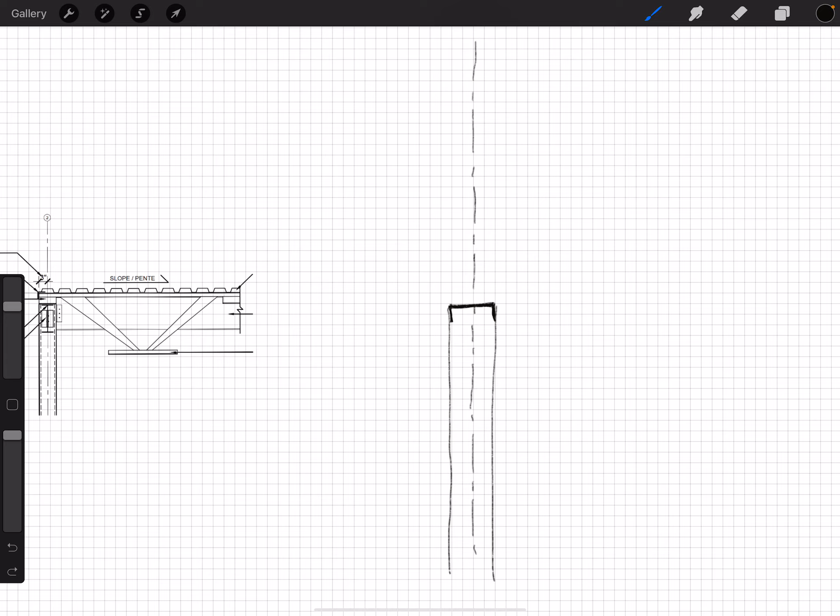I've got my stud. And on top of my stud, again, I need to put my I-beam, which sort of sits on the studs, but not really. It really sits on the column. And in your steel drawing, you've got the column there. But in between the columns are these studs. And the studs just kind of hold up the wall. They hold up the gypsum. They hold up the aesthetic parts of the wall. They don't hold up the structural parts of the wall.

And that's why this top guy here is a deflection track. It's almost as if it's not really attached to the ceiling. There's a lot of movement allowed in that wall, in that part of it. So we've got that. We've got our joist seat that comes on top. This is going to look a lot for a minute like it did on the second floor. So our joist, that's going to go there. And our joist is going to come down here like that.

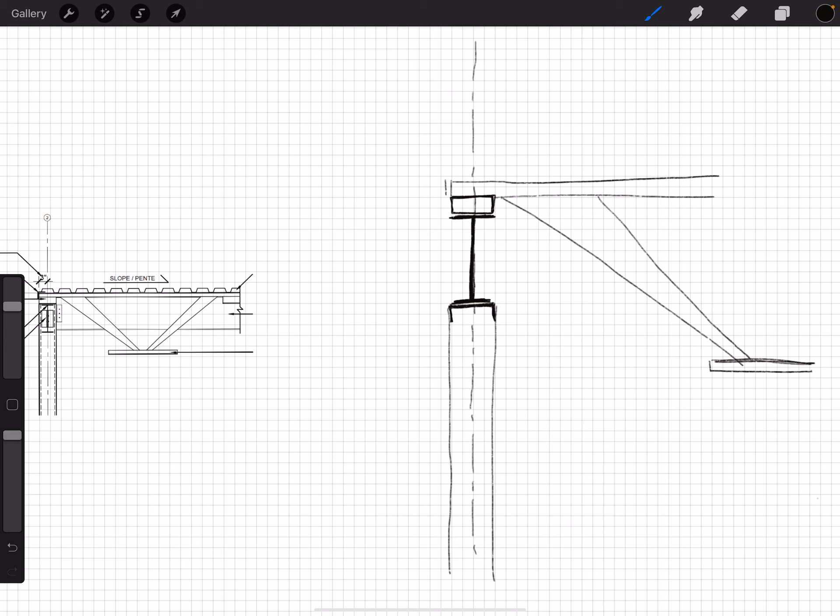And you've got the height of your joist from your steel section. You've got the I-beam size from your steel section. You've got your joist seat, etc. We know that we have this time an L angle. And I'm just giving this a little bit of space here that comes this way. And we've got our decking now that's coming on top here. Our steel decking, and this time no concrete, right? Because there's no floor. So that's pretty much what we're going to be showing here.

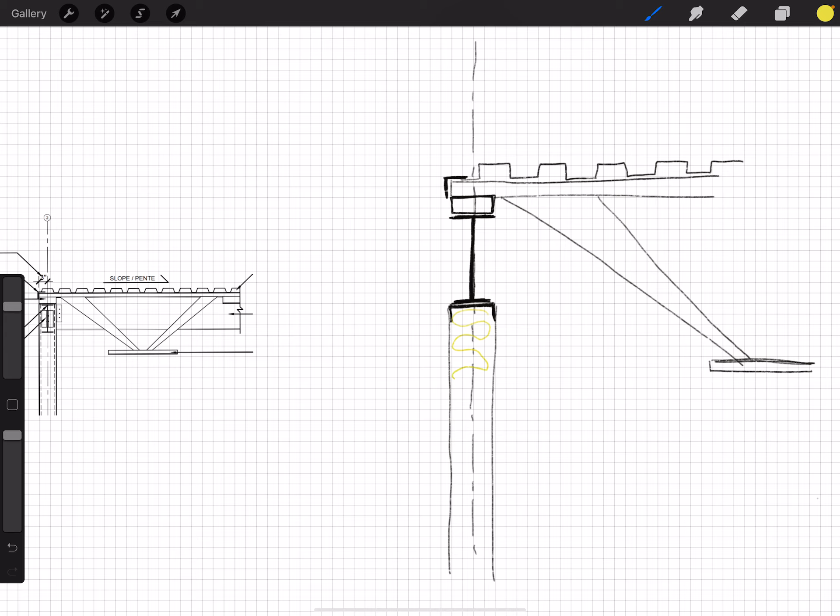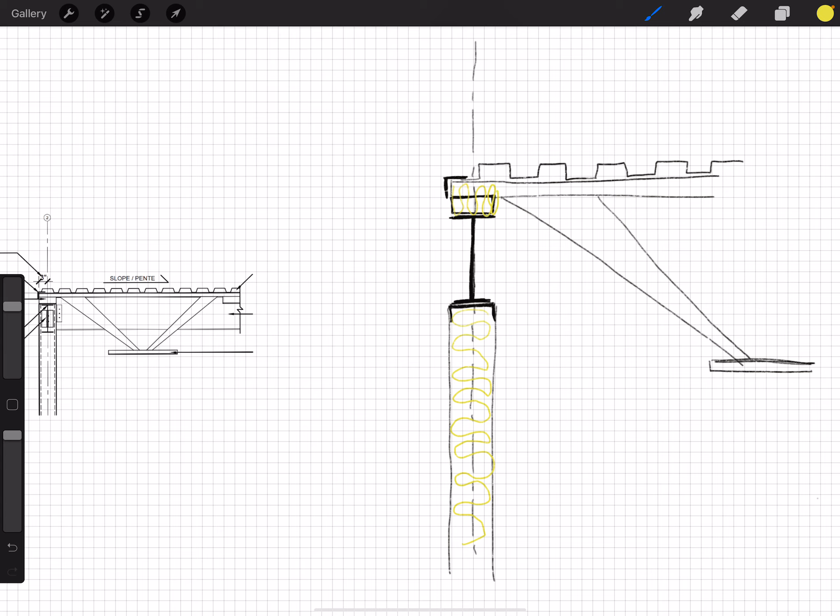That's new. At the bottom, we've got stuff that is the same as the rest of our wall. We're going to fill in this with our insulation. We don't have to put blown insulation here, remember, because that's the roof. We don't have to worry about the fire transferring up to another level. We just needed to worry about it transferring between floors. We've got this insulation here between the joists. We've got our mini, I'm going to call them mini studs, that sit in between our I-beam here. And then that's going to be filled with our insulation again. So we've got that just like on our second floor.

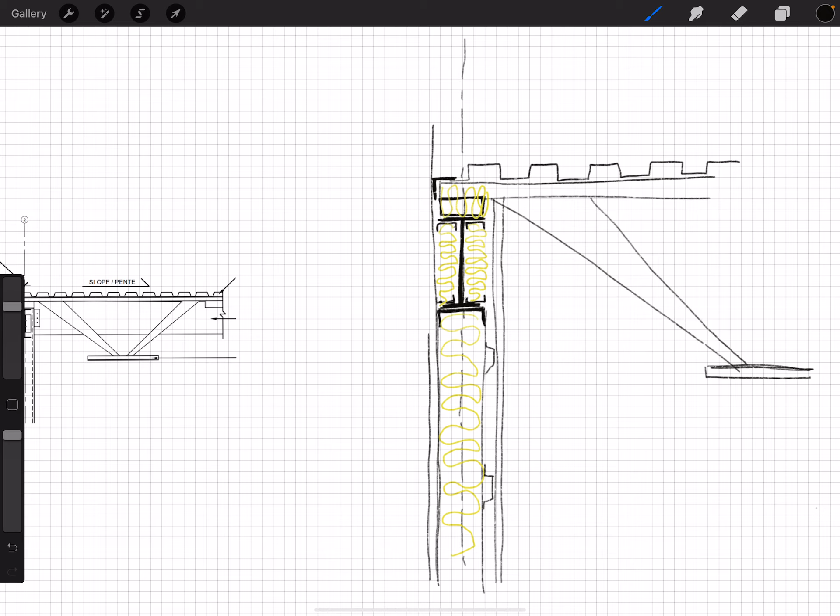And again, we're going to have our furring tracks here and our gypsum that goes all the way up to our joist level. We're going to show it at that level anyway. On the outside, for now, we know our sheathing comes, and it comes all the way up, and we know it's going to go higher because we're going to have a parapet. And a parapet is like a piece of wall that kind of sticks up above the roof. So we've got that.

We've got our spray insulation, and then our bricks, which I'm going to draw a little bit higher here. And every time I draw these bricks, they're slightly different size, but you have the sizes. We've already defined those sizes. Okay, my airspace is a little bit bigger there. So what we've got now, we've got to look at the top here, this roof.

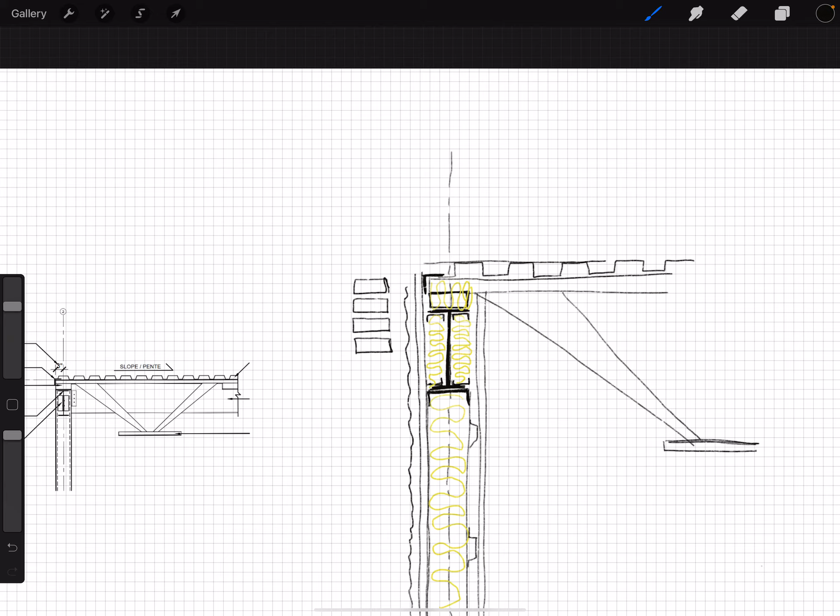And on top of the steel decking, we are going to put a plywood. And I'm just going to come back and actually cut this down a little bit, because I'm going to redraw this. We're going to put a plywood piece on top of the steel decking, because we do need a surface. It doesn't have to be a concrete surface, but we do need a surface. So we're going to put plywood, and that plywood is going to come and kind of just abut here with this sheathing like that.

And after that, we are going to fill this area here. Remember, all these voids are going to be filled with insulation. So this is all going to be filled with insulation in here. So we're going to fill all those voids with insulation. And I just wanted to check one thing.

Okay. So on top of the sheathing, and I was just checking myself, we're going to have our vapor barrier, because we want to make sure, of course, that we have the barrier so that the water doesn't come into the roof. So we're going to put that next on top.

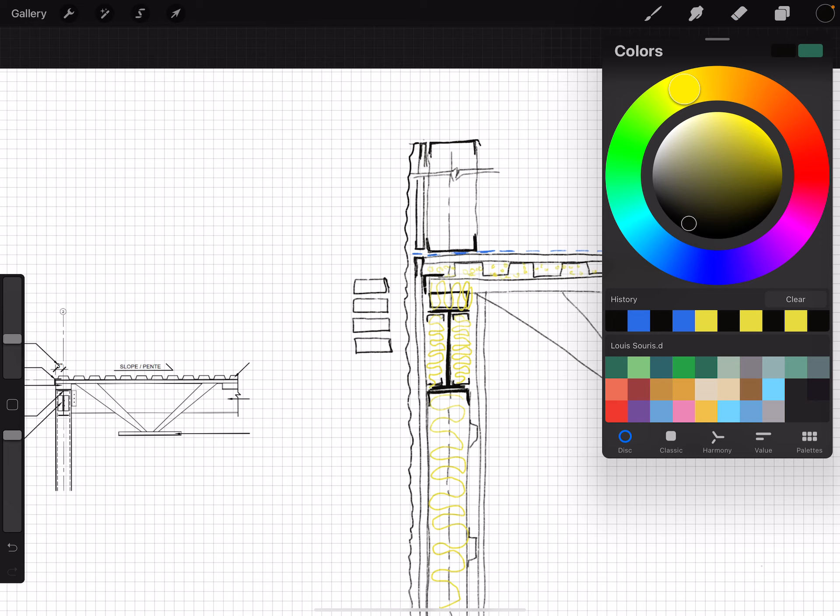Okay. So then this blown insulation now goes on top of this whole surface. But you just want to make sure that you get that detail here, that the vapor barrier comes out between the two pieces, and then the blown insulation goes on top. So the blown insulation is going to end somewhere around there, near the top. And that's pretty much where our bricks are going to end, around that area too.

And I'm just going to double check something myself in how that cap's going to go. Yeah. Okay. So now what's happening? Oh, let's add, this also does get some insulation in there. And we're going to add another sheathing on the inside here.

This time this isn't gypsum because this is outside. So we want to make sure that this isn't gypsum, and you want to make sure that you label that properly. It's sheathing, versus this over here is gypsum on the inside of the building. But this is outside now, so that's sheathing.

Okay. So the next thing we're going to want to put in on the top of the roof here is 2 layers of insulation. We'll leave a little bit of space because we're going to want to show another barrier that comes up there. So we want 2 layers of insulation. It's quite thick. So we want 2 layers of insulation here.

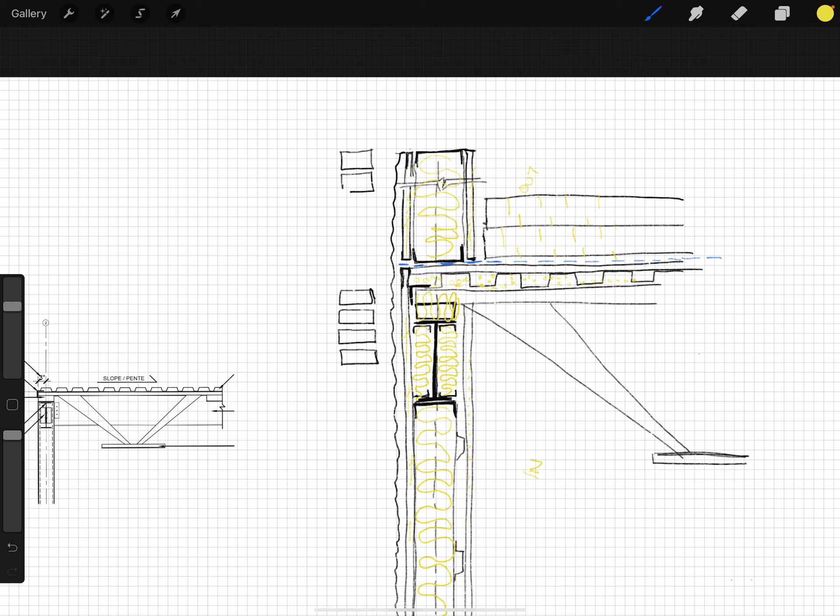And then what are we going to have on top of that? We're going to have a, what's it called? We're going to have a fiber board that goes on top of the insulation. So I'm just going to make this come out a little bit. And we're going to have our fiber board. And then on top of our fiber board, we're going to have our built-up membrane. And so this is a roofing membrane.

And I don't know if you remember from intro class, I know Professor Dupree talked about it quite a lot. This is basically layers of bituminous material that get put on top, and they just get layered and layered and layered. So what we're seeing here is our fiber board here. It's 1/2 inch. I'm going to write all that in a second. Our insulation and then our built-up.

And then we've got this sort of funny, it's probably one of the funniest sort of things. I'm going to erase my little line here, the break line. One of the funniest kind of things in architecture, I find, is this little triangular kind of piece, and it's called a cant strip, and that goes there.

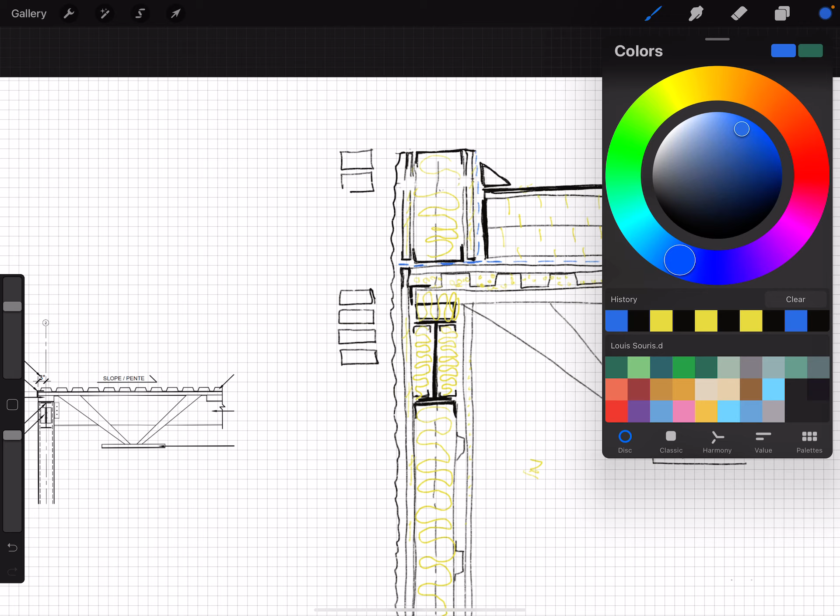And we're going to want to have our barrier come up here, and it comes up behind the cant strip, and the bituminous material actually. So let me just correct this a little bit here, because I've got the fiberboard here, but really the bituminous material that goes on top layers over it here. It layers over it, over the cant strip. Like that.

And then filling in here is what we call river rock. It's like little gravel. And that kind of has a surface of its own. That's our river rock. Okay. So then the parapet part that kind of sticks up, we're going to continue our sheathing. It's going to go up. And it's basically like a little box. I'm reaching the top of my paper, but I think I can fit it in without extending it.

The parapet is going to have a little bit of an angle to it. I went too far. It's going to have a little bit of an angle. These are pieces of plywood. And, oh, no, I didn't go too far. I forgot about my brick. So we'll go back. It's got to extend over the brick layer.

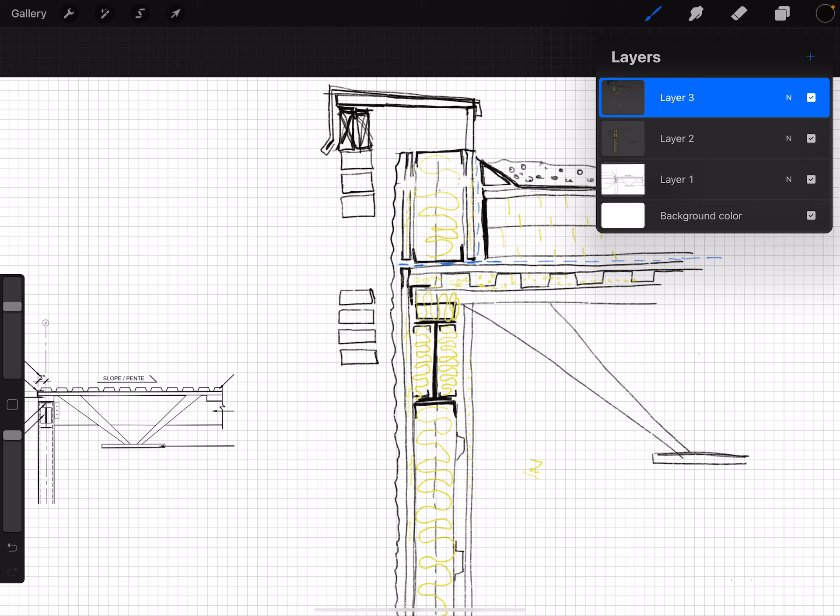and this is where my parapet should be a little bit higher than my river rock. This stud should extend a little bit higher. So give this more room. I just ran out of paper space because really from here to here should be P1, which is parapet 1, and it should go through the stud here. So make this higher than I have in this drawing. You could make it quite a bit higher. About a foot or so. I just ran out of room.

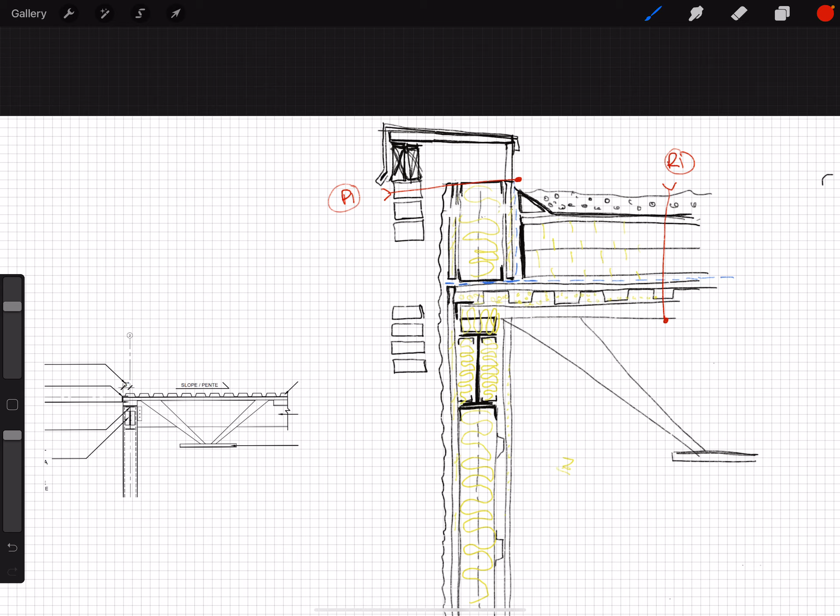So this is P1 here, and that is going to be parapet 1. This composition here is going to be R1 for roof 1. And of course, you're going to fill in all these bricks as well. You're going to also show the dimensions at the top. And maybe I will add a bit to my drawing here, just so I have a little bit more room.

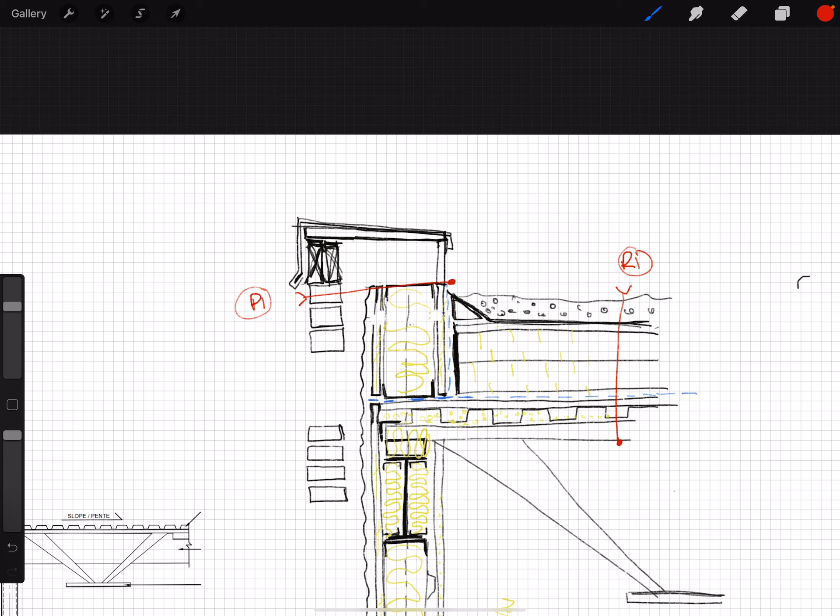And we're gonna dimension, again, this. I lost my structural grid here somewhere. It's gonna come out. So we're gonna add our dimension, our total dimension of our wall, and the dimension to the structural grid and from that side, which is what we defined in our first class. So the other thing that we need to do is add our elevation levels. So we want the top of the parapet.

And we've got that. And we're going to do the top of steel of the roof here. And that's right here. Remember, it's on top of the joist. So top of steel for the roof. And that corresponds to the same top of steel that you had here in your steel section. So whatever that is, XX, whatever that number is that we already defined.

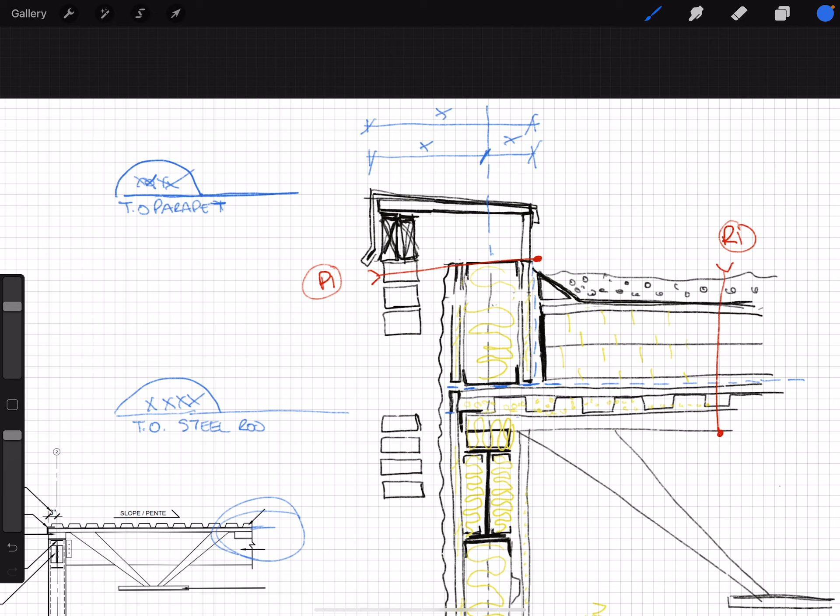So now we're going to add a couple of annotations. We're going to add the ones to this section that are similar to the ones that we did to the level below. So we want our structural I-beam. We want to note that. We want to note our 2.5-inch studs with our spray insulation. We're going to want to note this spray insulation, or sorry, blown in insulation. Sorry, no, spray insulation, spray.

We're going to want to note our deflection track. I'm just abbreviating it here because we have all these in the previous explanation. We're going to want to note, at the top of the gypsum right here, there's a caulking bead, sealant. We can put sealant there. We're going to want to note, what else?

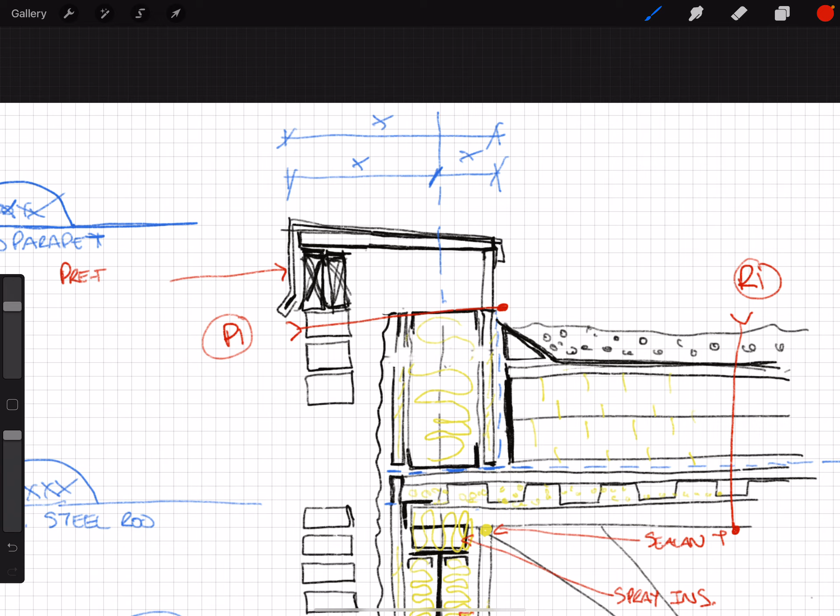We're going to want to note a couple of things in the parapet. So we're going to say, for this, it's a cap. It's flashing, but it's sort of made as a cap. So we're gonna call it pre-finished, and you can specify a color. Pre-finished metal flashing. There's over here, just in the corner, a metal cleat. It's like an anchor.

We're going to want to specify one thing, that we've got the vapor barrier coming up. So we've got it here. We should have it here. And we're going to want to make sure that it comes up at least to this point. So we're going to say continue roof vapor barrier 6 inches on exterior sheathing. Actually, they kind of overlap a bit here, this one with this one.

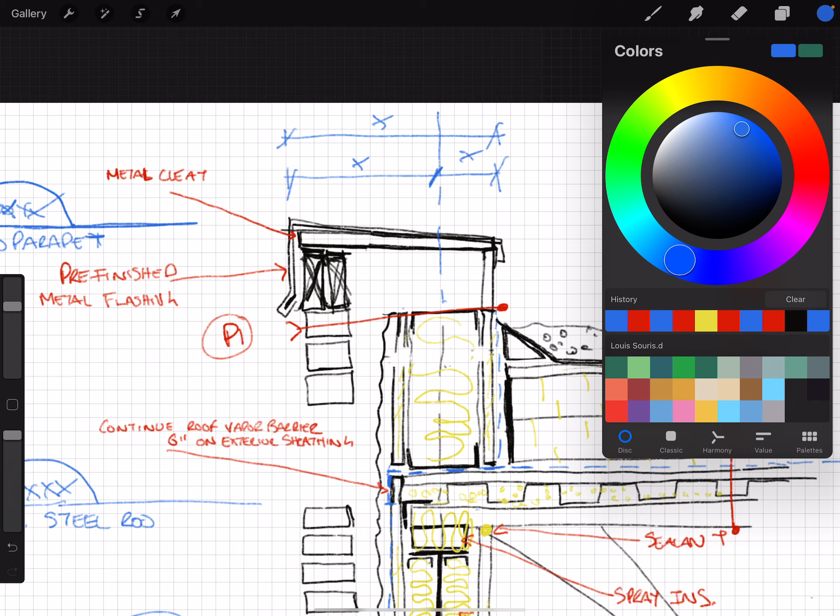Now, what else do we want to point out? We've got on our inside here this vapor barrier, so we want to make sure we label that. Barrier. We want to point out this plywood that's behind. That's this guy here. We are going to want to specify here that we're going to fill the voids with insulation.

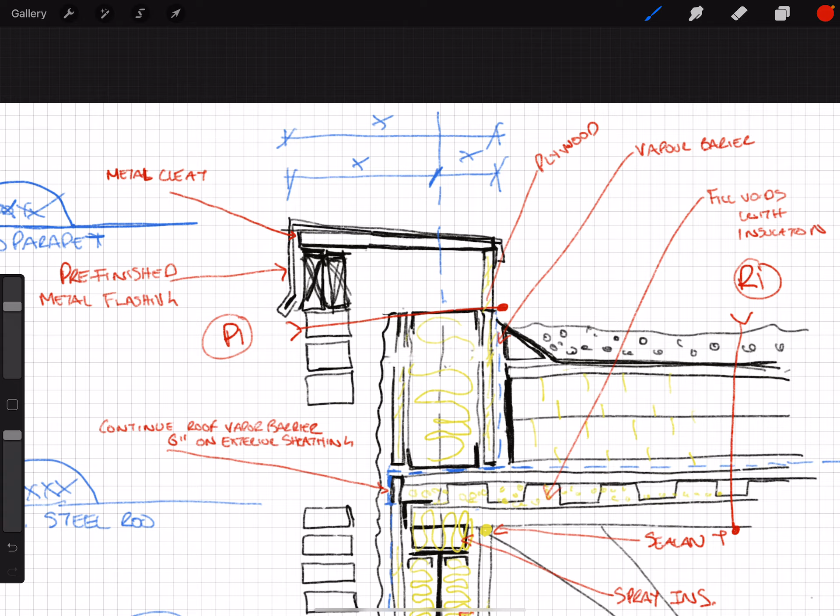And the rest of it is going to come from R1 and P1. So R1, which is our roof composition. On R1, we're going to have river rock, and that's the gravel. Then we're going to have 5 ply built-up membrane. And the amount of plies is basically how much you want to pay. You could keep going. And we're going to add fireproof to this as well. And of course, the fewer plies, the more likely it is to get punctured. More plies become more expensive.

So there's a balance. Then we have our 1/2 inch fiberboard. Then we have our 6 inches of polyiso. I'm looking this one up because I never remembered the name. Rigid insulation. And there are all sorts of different types of poly insulations. Insulation in 2 layers. I think I said they were 2 inches each, so they're more like 3 inches each because it's a total of 6. And then we have our vapor barrier.

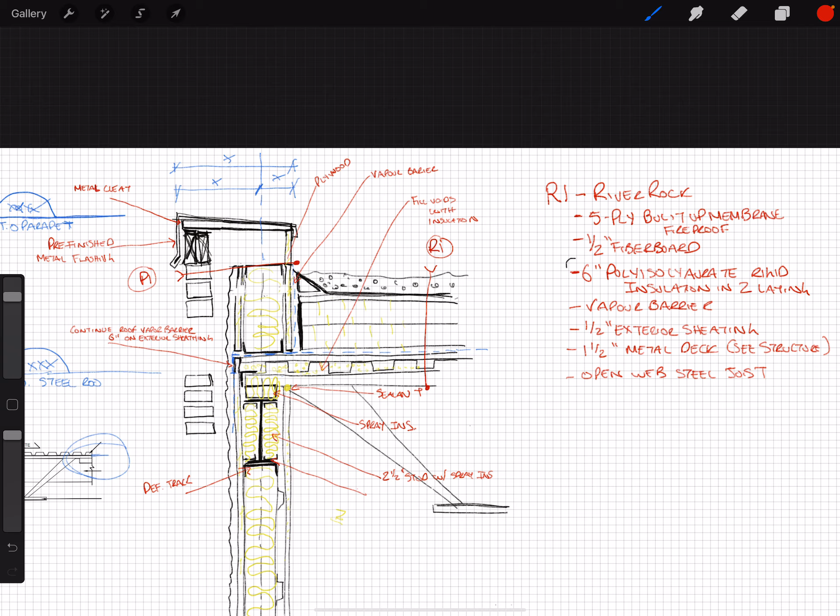And then we have our 1/2 inch exterior sheathing. And then 1 1/2 inch metal deck. And we always say see structure. And our open web steel joist. Okay, so that's our R1.

And then our P1, which is our parapet, is going to be our brick, 3 5/8 brick, our 1-inch airspace, our 1-inch spray applied insulation, our 1/2-inch sheathing. I think we were calling it sheathing below. It could be plywood, but it's 1/2-inch sheathing. Our 3 5/8-inch metal studs.

Hold on 1 second. I'm just going to verify this number and get back to you. It's at 16 inches on center. Our insulation, it's batt insulation. Then we have 1/2-inch treated plywood. Remember, this is on the inside part here of our sheathing. And our roof membrane, and what we're going to call our metal counter flashing. And that's going to form our parapet.

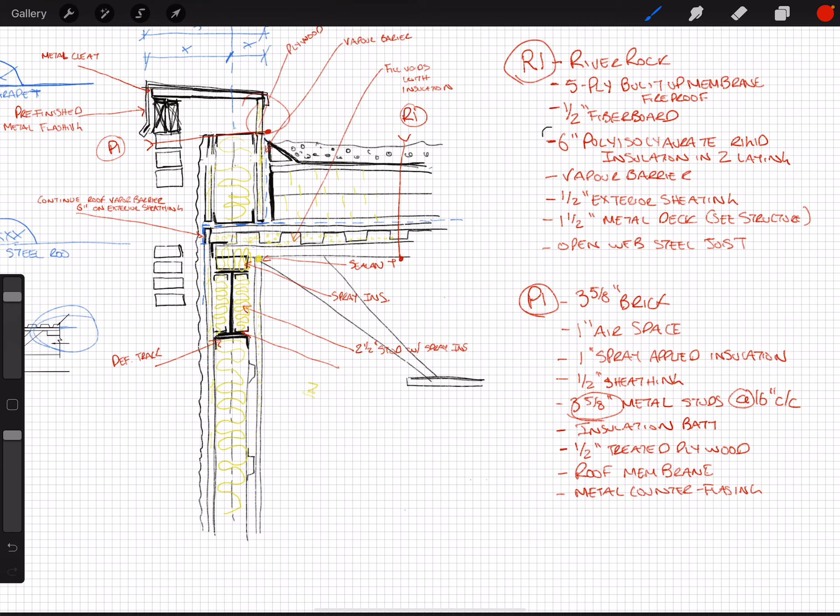So I'm just going to quickly look up the parapet size of our stud. And maybe I'll get that back to you.